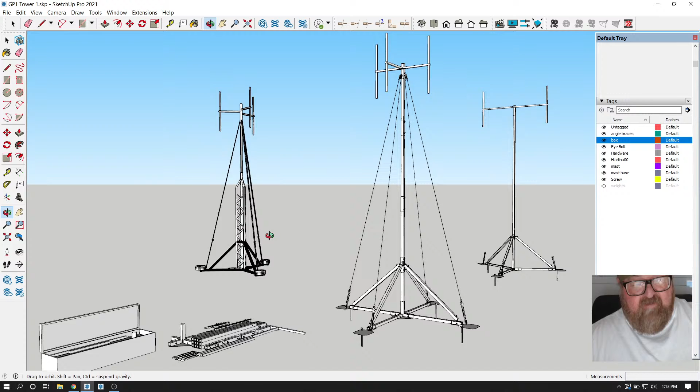I just want to let Alex know that he is working with a UAP artisan. And now he's like, oh, you're a fruitcake. Okay, I get it. No, I'm just kidding. No, I just like to have fun while I'm doing design work, especially highly technical UAP related science.

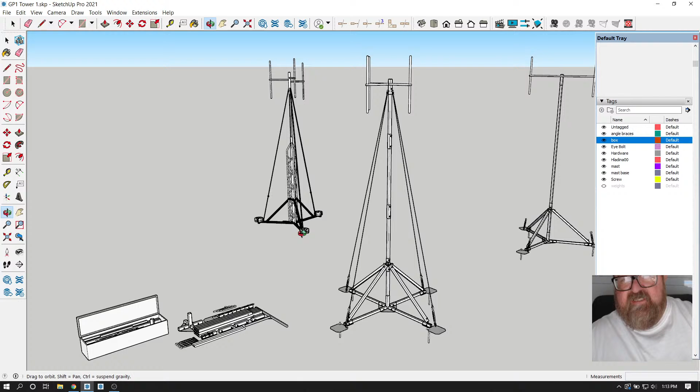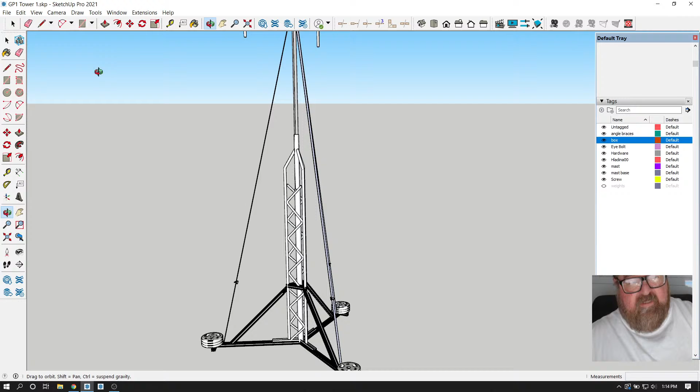So it's kind of a long story, but I had volunteered a while back to help the Galileo Project in any way I could. And the first thing I started out doing was identifying objects in photographs. They have a little server that will show you a photograph and you will help identify it, and then weed out the bad photographs. And I believe that has to do with machine learning, helping algorithms spot aircraft, but I could be wrong.

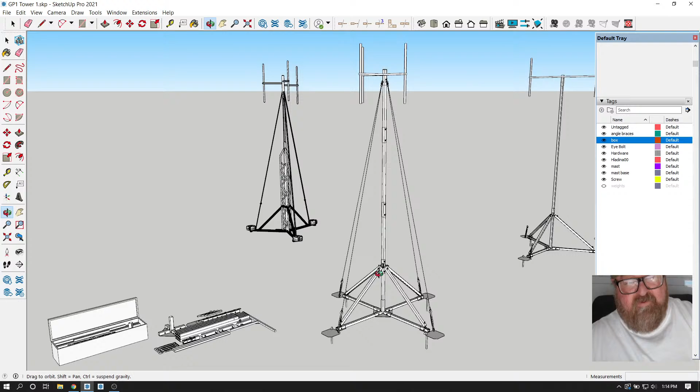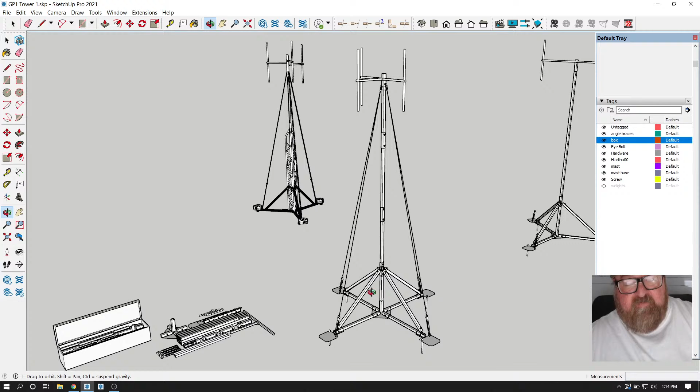But then I thought, okay, I have to be initiated, so I have to do the grunt work first. And so eventually I got contacted to do this work, and I'm working with Alex. And I can say Alex because my son's name is Alex. I'm not at liberty, I don't think, to give out much information on names yet until I get permission. But anyway, he contacted me about an antenna tower that could be portable, and he sent me this.

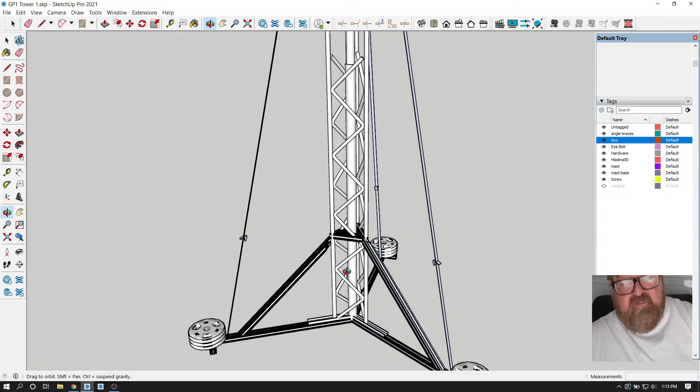And for those who don't know, I'm a design build contractor, so I do a lot of fabrication work also for the projects that we do. And so this kind of thing would probably be great for a more permanent situation. What I think the idea is, is to have a portable setup. So I just wanted to go over my idea right quick and see if I'm going in the right direction.

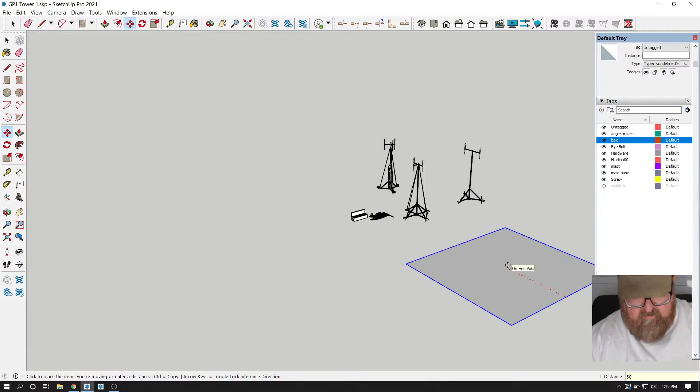I think I lost my ground. Where did it go? I moved it out of the way to do the thumbnail. Let me put it back over here. I have to have ground. All right, that's good enough.

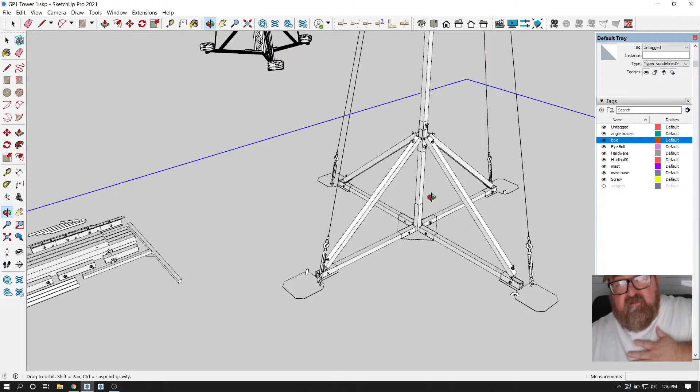So let's start with the base. And again, let me start off with this concept of fabrication. For me, this is not a big deal as far as fabrication goes. To someone who hasn't done any kind of steel fabrication or any type of fabrication at all, it may seem elaborate, but to me, this is not. So keep in mind, this is coming from a contractor who would find this easy to build. As a matter of fact, at the end of this, I'm going to suggest something.

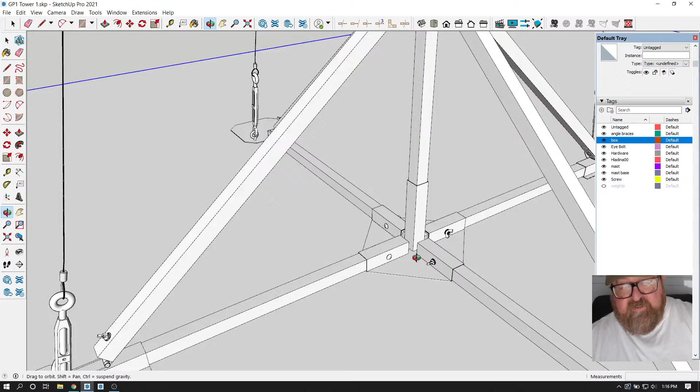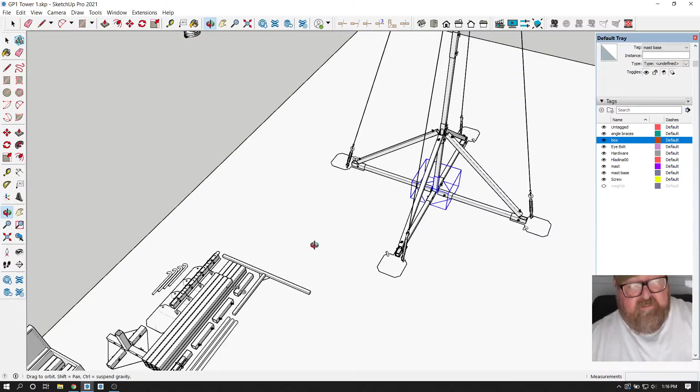But anyway, so this is a base plate. This is the foundation of it all. And the idea is that this would just be its own part, right? And it would be fabricated with these tubes that are welded to it. I have the parts laid out over here so you can see them individually. See, that's a part. And those little square tubes are welded on there, so they're permanent. So you have that part, and then these are individual tubes. These are fiberglass. All of these other tubes are fiberglass. They're 2.5 or 2-inch with a 1/4-inch wall.

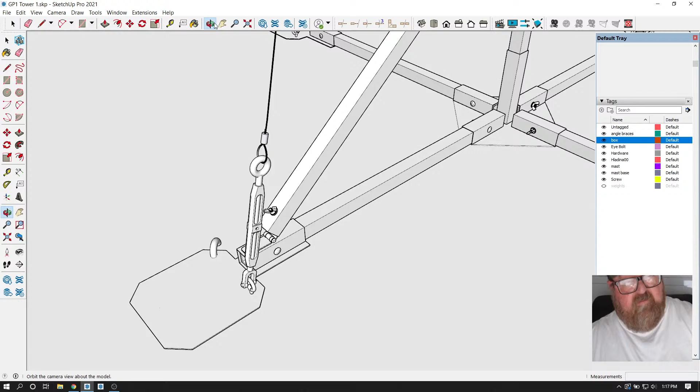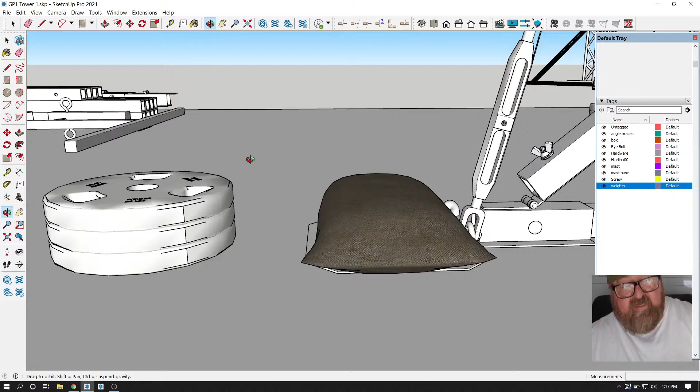Then you have these outer base plates, and this is where it gets interesting, I think, so bear with me for a second. This thing needs to be weighted down, so you can either put sandbags or the weights. They have these weights. As a contractor, we think more along the lines of sandbags, or something that can be locally used, unless you want to haul these things around with you. In any event, there's a base plate for that. And again, this is a part that's made.

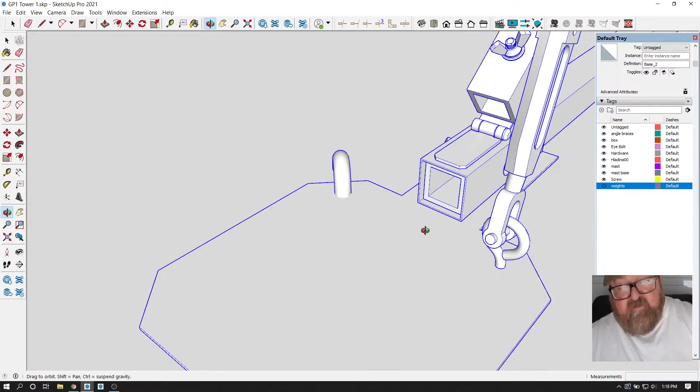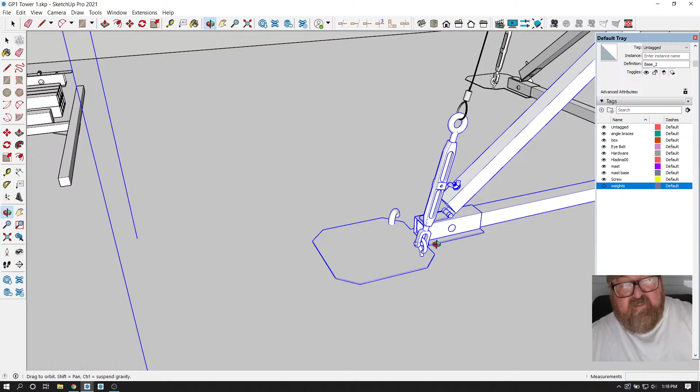In this base plate, you have a hole that could be used to stake it down if you wanted to. A hole and a rebar stake, if you got out somewhere and you forgot your weights or you didn't want to load the weights around, because I think this whole kit's probably going to weigh less than those weights. I guess that's the idea. But if you didn't want to haul those weights around with you, you could just stake it down with the holes there.

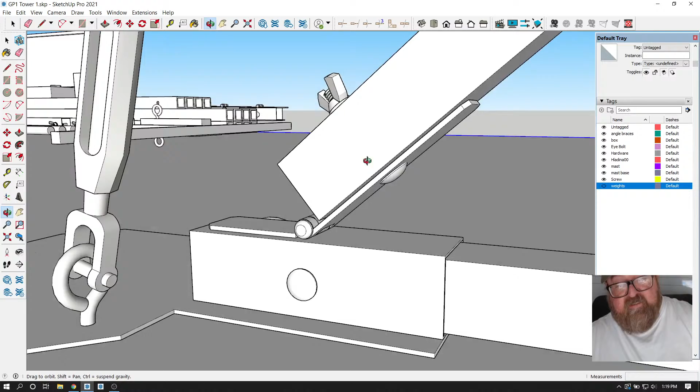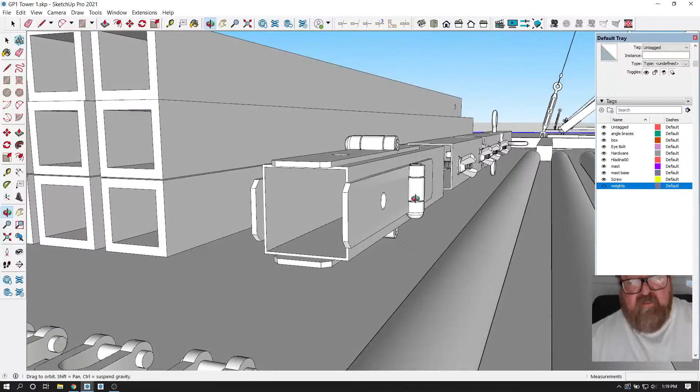So the concept that I'm headed towards here is portability and easy fabrication. The idea is to have these other sleeves welded to this base plate and to have these hinges welded to this. And so there's a hole in that strap hinge and a hole in our thing, and when you come up here, this is another part right here. That part is laying right here with the hinges. Again, a lot of this has to do with foldability, portability. All these hinges can just be flapped down. These are all welded to this sleeve. Now, the hinges do several things for you.

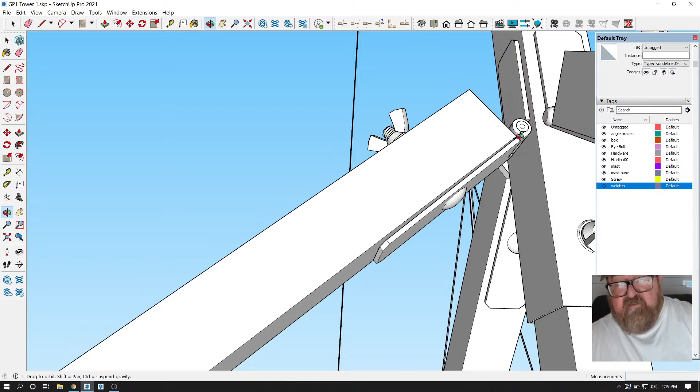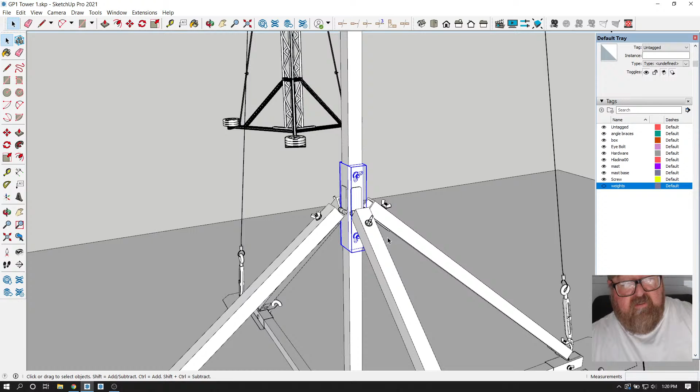It allows you to change the angle of this brace, okay? So let's say you wanted a tower that was a lot taller. Say you wanted to add a section and you felt like your braces were too short. Well, all you would need are the braces that you were going to substitute, and this part of it can be raised up. Whatever, those are actually attached.

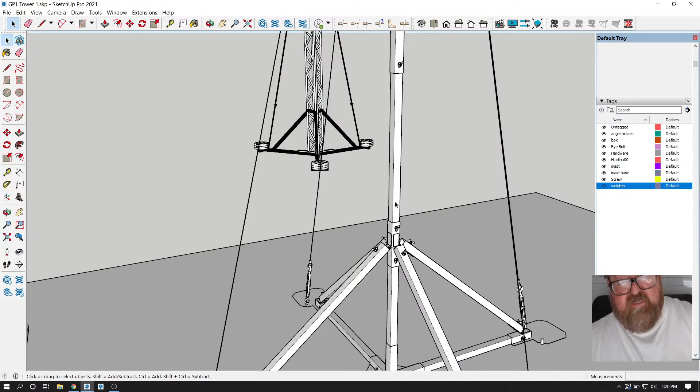I see what I did. I put the hinge in. This is a component. But the idea is that those hinges are welded to this sleeve, and it could be raised up. And since you have a hinge, the angle of your brace can change. As you raise this up, this could be folded down and still used. You would just have to have a longer brace. But the main idea behind that hinge bracket is so that it will fold down and neatly store away.

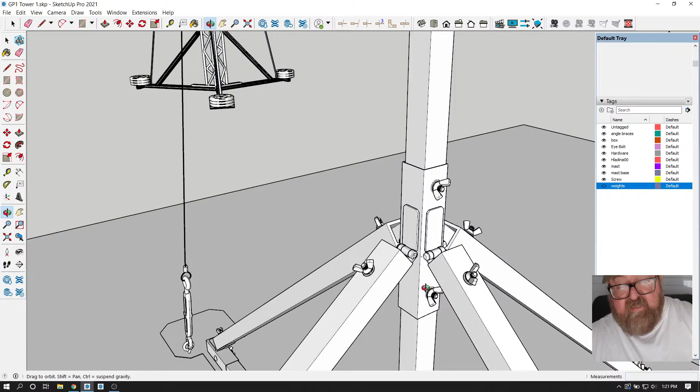And then you just have sections, however tall you want the tower, you just have these other sleeves, and there's a joint in the fiberglass square tubing here, and then you'd have a hole in it that you would be able to use wing nuts. All this is real simple. The only hardware are these wing nuts.

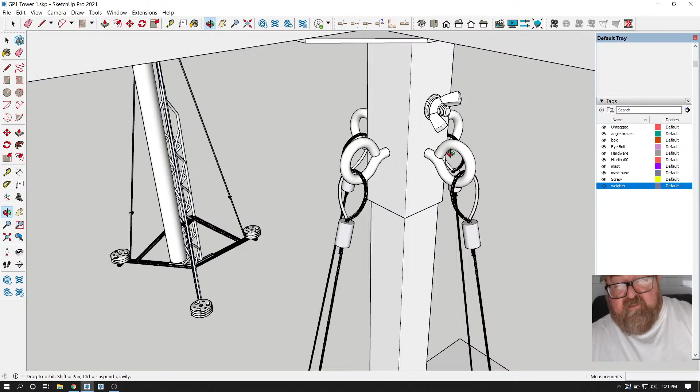Okay, and you come up here to the top, and this cap, this is a steel sleeve with a cap on it, so it just slides right over the fiberglass tube, okay. These might be a little big. It's already got the attachment points for the cables if you need those, and of course the wing nut there. And then I haven't quite figured this out yet. I'll have to get with Alex on this. And there are brackets. This might have to end up being offset.

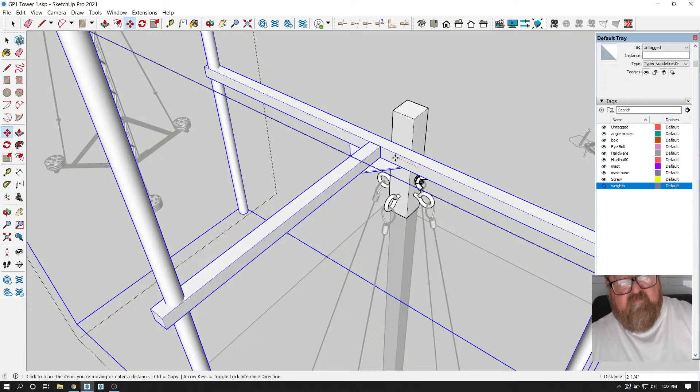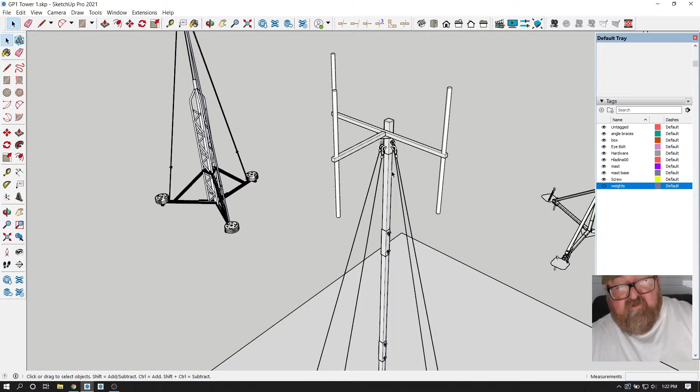So this might be offset, and maybe this is different. But the point is all these would be parts that could be disassembled, and the bracket. There's a bracket that would hold this antenna mount onto that sleeve up there. Again, I didn't want to go too far. I wanted to kind of get the concept down and get that approved. And then what we would do is actually figure out exactly how it would be, all the parts.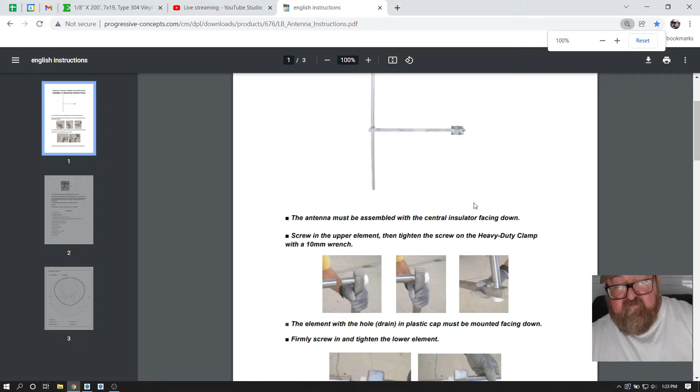Now, so far, all these parts I have shown, I'm bookmarking. I've done research on the antenna mounts. This was the information provided to me by Alex. This and this. So the idea is just to keep a sort of a link database going.

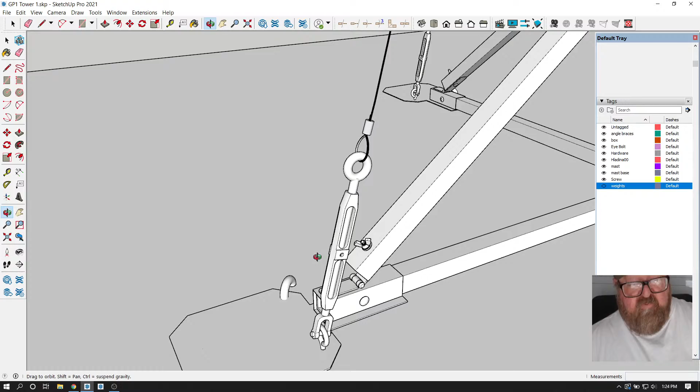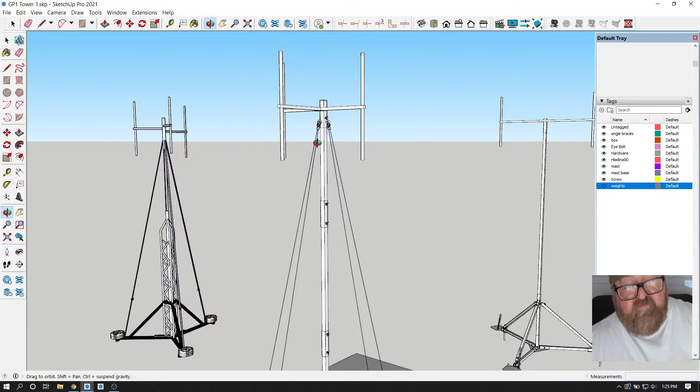But these are real parts. And of course this would be welded to the base plate. And then you'd have your cable with a crimped on tie nut there. And then that just goes up here. And the sequence would be that you would assemble this mast first, right? So all of this stuff would be laying on the ground, and you would have all this base assembled, and then, I'll see if I can find a pivot point here.

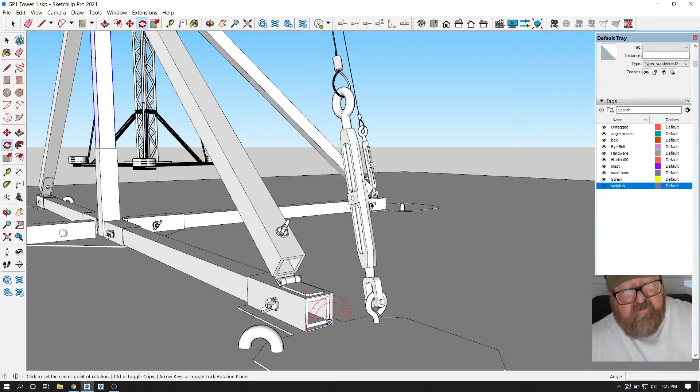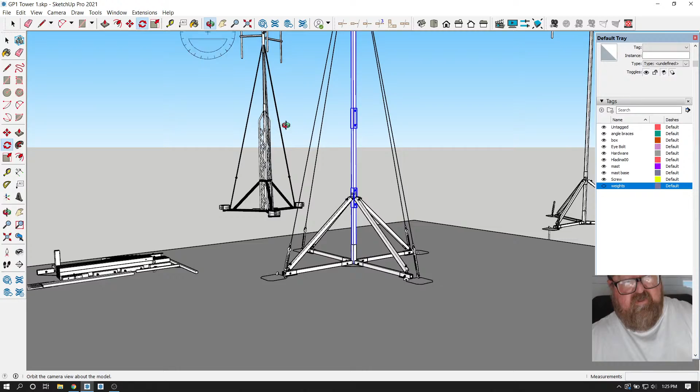And this would be laying on the ground like this. And then, and we do this a lot in construction, you'd have somebody holding their foot at the bottom and somebody else raising it. And then as you both held it up, you would just slide the wing nuts through those holes in the hinges and tighten it off, and voila, there you go. And you would have already had the cables attached before you raise it up, so there's no need for ladders or anything.

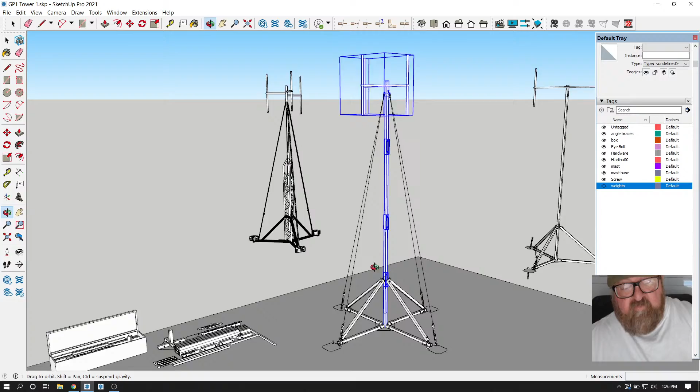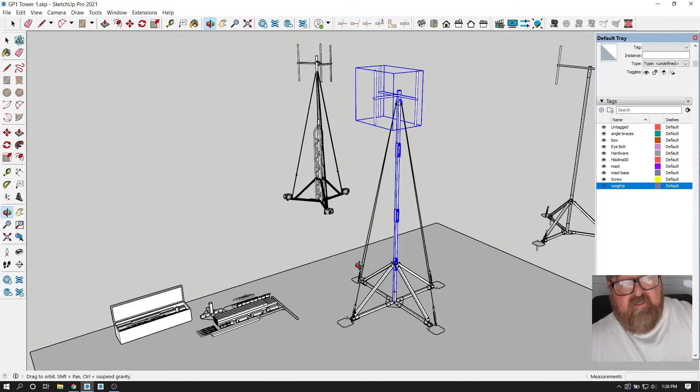So then as that gets stood up, you attach your braces, and then your cables if needed. If this is only going to be up an hour or two, you don't even need these cables. But if it's more of a semi-permanent situation, you've got your turnbuckle, and you can stake it off to the ground, and it's pretty secure. I'm thinking this thing will withstand 75 mile an hour winds probably, since there's not a lot to catch the wind. That's the nice thing about towers like this.

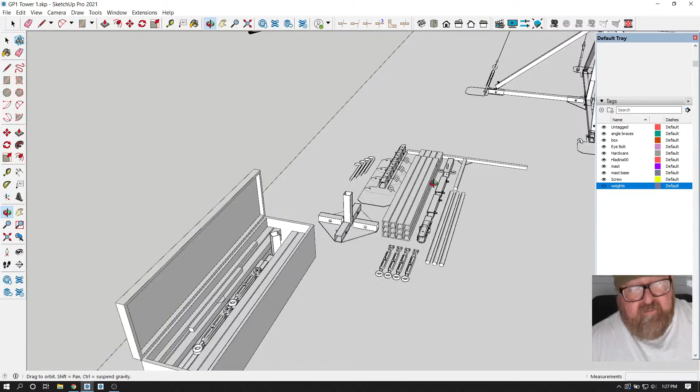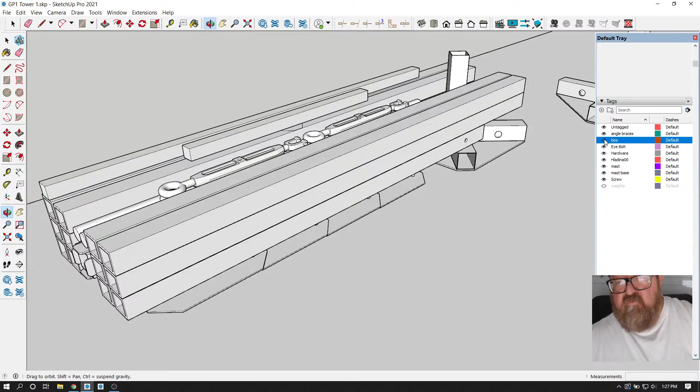So you say, okay, how would all this break down? Well, pretty nicely, actually. This is literally all the parts right here, laying here. And then we could build a case for it like this, and this is all the stuff in there. If I turn off the box, you can see it's all stacked in there neatly. There's a few little quirky things, like these would have to sit up a little bit higher because of those eyelets.

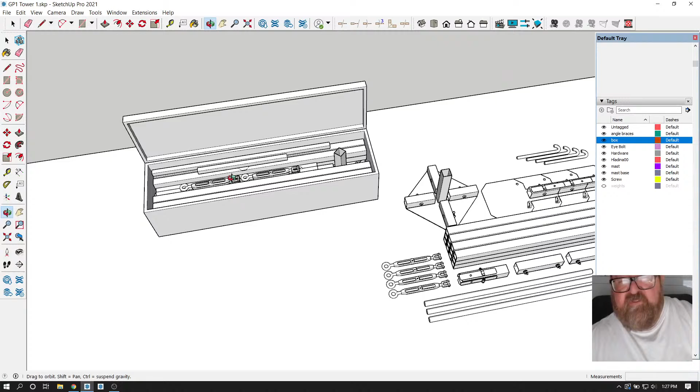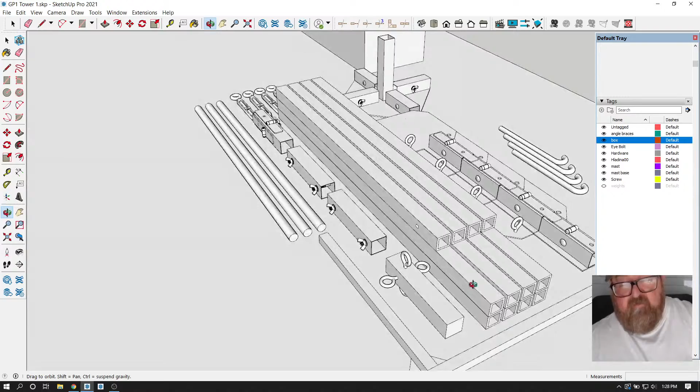But it'll all fit, and that would be part of the design parameters or criteria. How could you get this down to a certain size? Right now I think it's 16 inches by 5 feet. And these sections, the longest section I have for some reason is 4'9" here. With all the bulk adding up, I think I got it to close to 16 feet, but whatever the height requirement is, 16'7". And these parts are based on being able to purchase 20-foot, 2.5 or 2-inch fiberglass, FRP tubes.

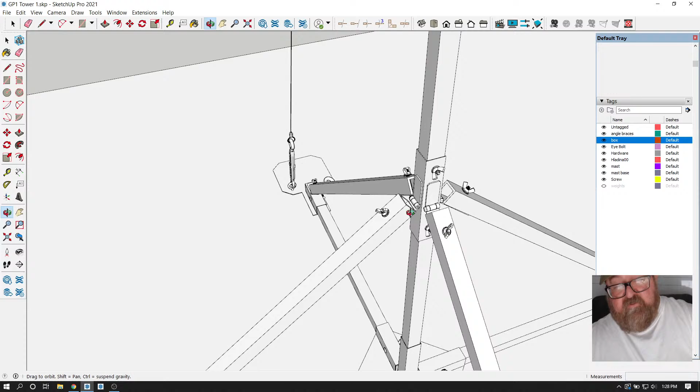Now, a word about fabrication. You're going to wonder why there's 4. Okay, this can easily be fabricated this way, so everything is nice and flat and square and flush. Now, I started off trying to mimic this design, and I ran into some problems with fabrication. So I think if you want to keep it simple, you just go ahead and have that extra leg.

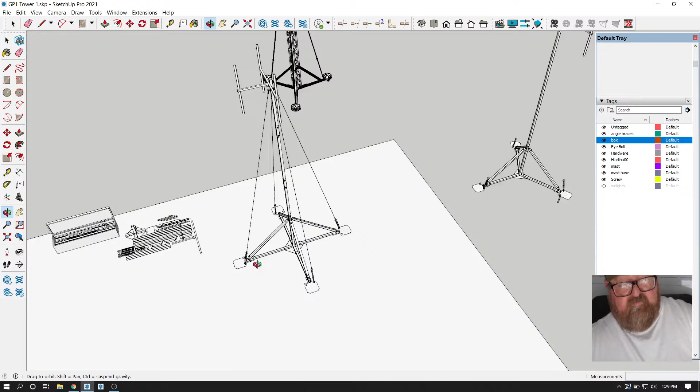And the thing about it is, if you ran into a place where you had a boulder or something, you could always leave off that leg and just use the cable to strap it down, to tie it down, because you'd already have the equipment needed. You'd have your stake and your cable. So it gives you some flexibility.

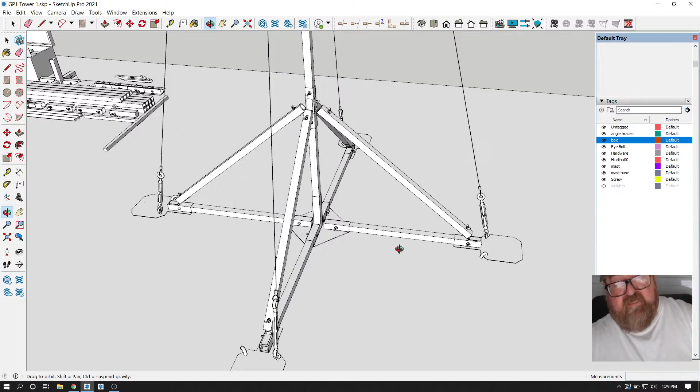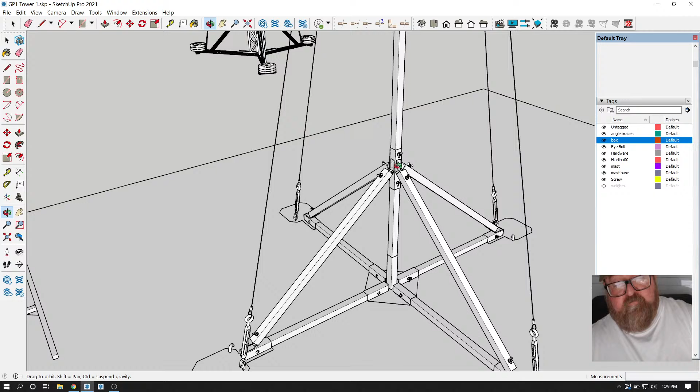There's lots of flexibility here in this design. With being able to change the angle of the brace, it's not fixed. If you wanted a taller brace, you just use a taller first section here. As a matter of fact, if you were going to make the whole thing taller, you would just change this one section, and it would coordinate, because the rest of these could stay the same.

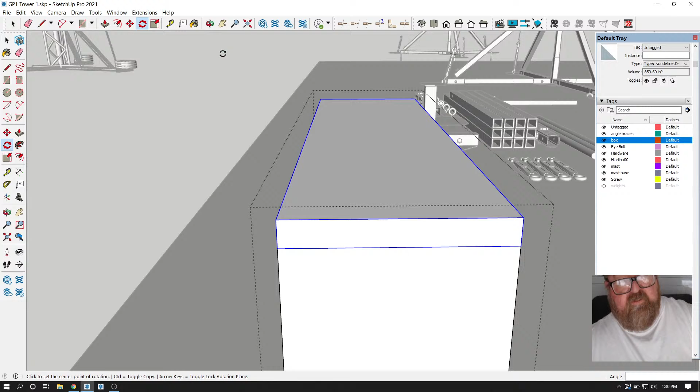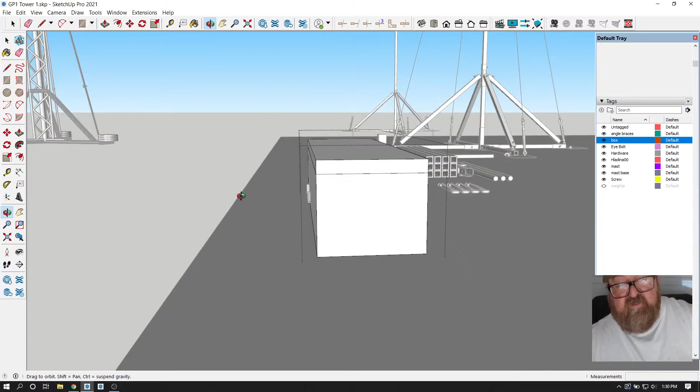This box could have straps, handles, or holes in the ends of it to make it easy to carry around. And I would probably try to keep this box to less than 5 or 5.5 feet, so it'll fit in the back of a regular pickup truck or even a van. At 5 feet, you could let the seat down in an SUV and put it in there. So that was my goal, to be able to get it into a nice compact package like this for shipping and just toting around to different jobs.

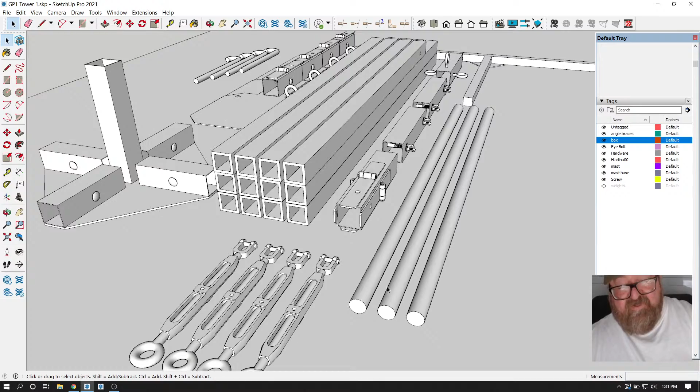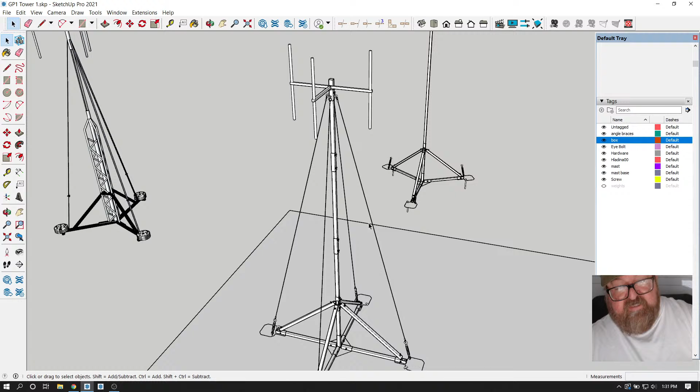These are dipoles. I'm not actually an antenna expert, I'm a construction guy. So I think these are the dipoles, the antenna, and I'm not quite sure how the cables get routed, but I do know we were using fiberglass mast here, this pole, this tube, to keep from transferring. I don't know how you keep from transferring, I guess you're worried about conductivity. I guess these cables can't be steel, they have to be something else. Then this is a question for Alex.

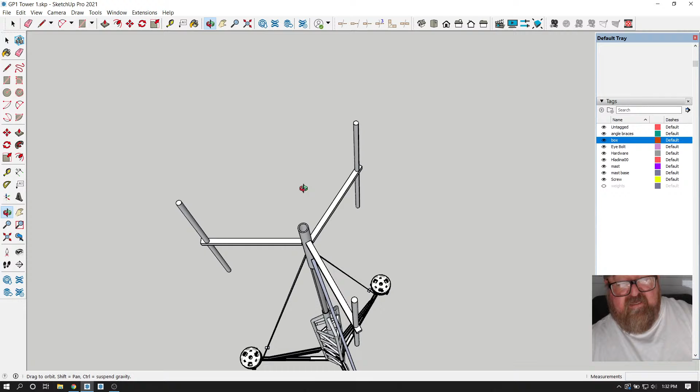But anyway, that's just the idea. And if anybody's wondering, this is the same configuration, or it would be, as this. This looks like a triangle, but it's the same thing. This is here, and then that is there. You see, all I'm doing is replacing it with a straight bar from here to there. Whatever this relationship here is would remain the same. And of course, again, I'm not an antenna expert, but I tried. That was part of what I was trying to do.